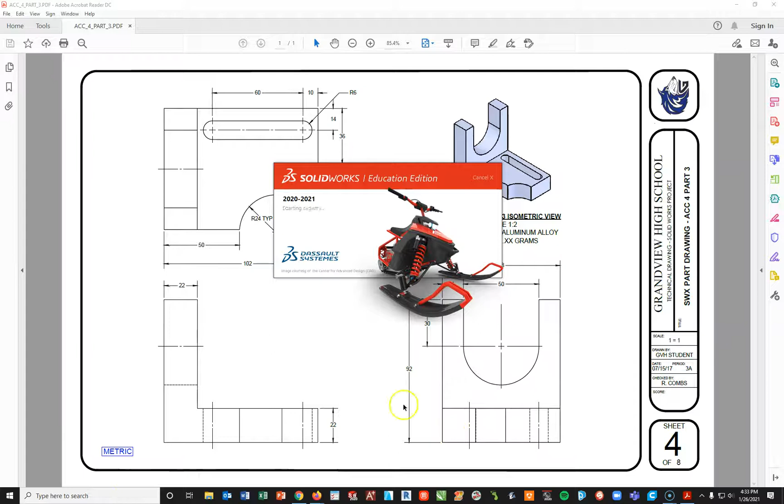So we're going to start with our SOLIDWORKS. I'm going to go ahead and get my SOLIDWORKS up and booted. It'll take just a moment here, but as it's booting up, let me talk about the plan of action.

Okay, I'm going to start this from a front plane and basically create this L shape right here. That will put me on this face over here. And what I'm going to do is extrude it across, turning it into one basically L piece, an L bracket.

With the L bracket, then I'm going to come in and hit this back face here and do this U cut. Then I'll come back to this face here and cut out the slot and these two little cuts here. All right, we'll add our material and we'll throw this into the drawing.

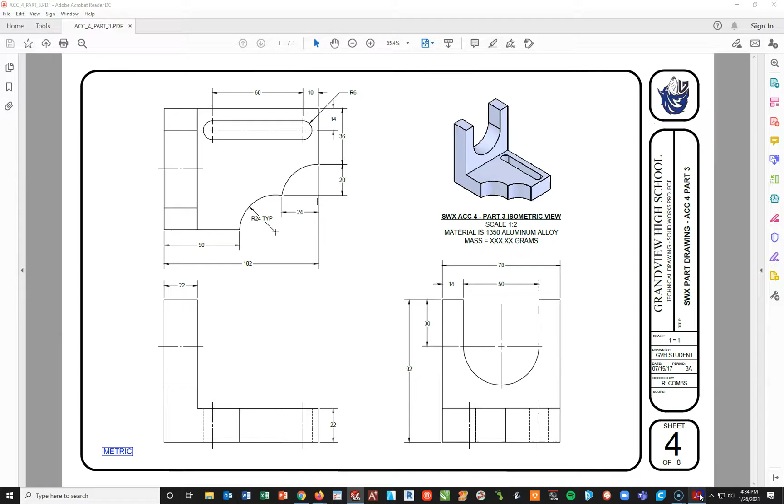So with that said, let me drag my SOLIDWORKS over to here and get started on our metric part. So I'm going to do a File New, and in this case right now I'm going to slide over my part so I can see my dimensions. And I'm going to go ahead and start with a File New. Okay, it takes a second to boot up.

Maybe, it's on the wrong page. It comes over here, and I'm going to go ahead and click on Metric. Say OK. Design tree is going to open.

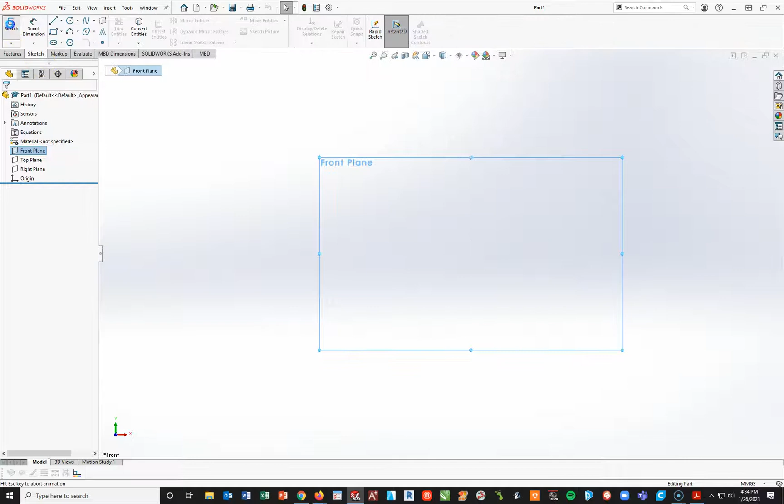I'm going to start off on the front plane with my sketch tools. So Sketch and Start a Sketch. And I'm going to start off with a line tool, and I'm just going to basically take my line tool and create a large L shape.

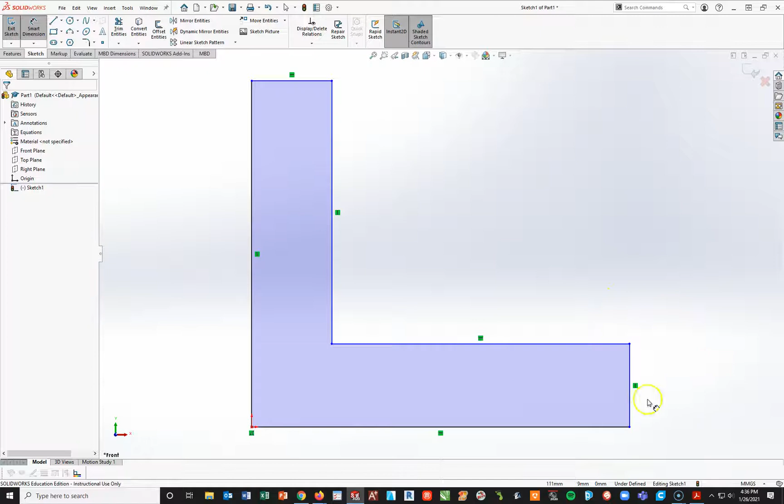I'm going to hit Escape to deactivate my tool. Hit your F key to center up, and go ahead and start our Smart Dimension tool. I'm going to hit 22 on this side, and 22 on this side.

And then I'm going to go ahead and get the overall height of this at 92 millimeters. Ooh, that's really close. Okay, and then the length of this is going to be 102. So I'll put 102.

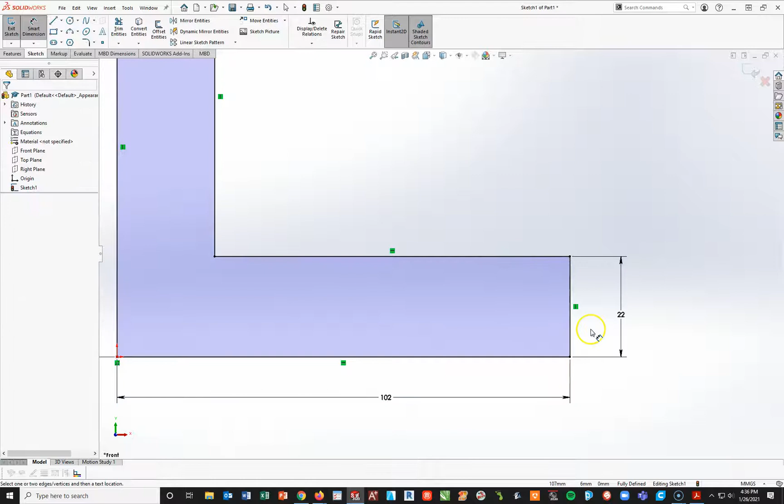I'll hit my F key, and then I'm going to go to Features, Extrude Boss Base, and extrude this out a distance of 78 millimeters. And hit my check mark.

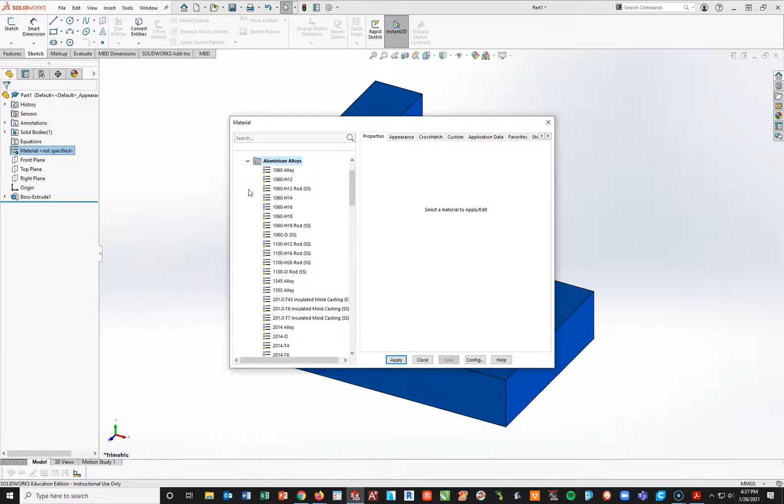Hit my F key to center up, go to my material right here and right click, and I'm going to go ahead and add my material, which is an aluminum alloy. So I'll go to my aluminum alloys. I'm looking for a 1350 alloy. So I'll go down here and order 1350 alloy, apply, and close.

I'm going to do a Control S to save. Let's go ahead and save this as all caps, ACC4 underscore your last name, and hit save.

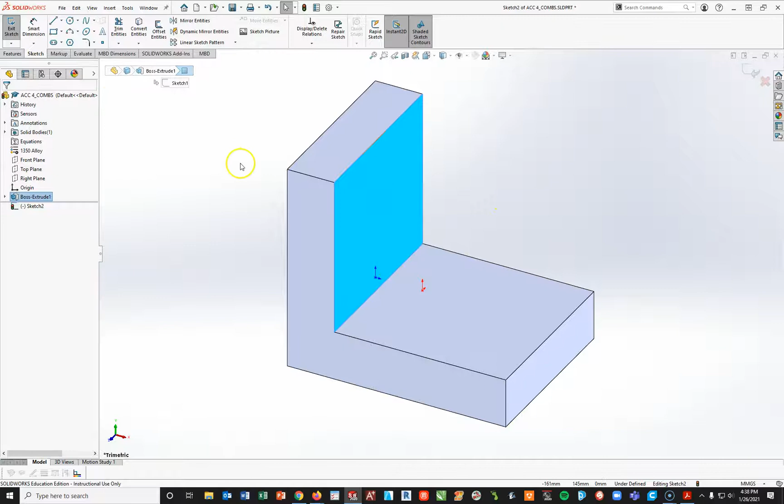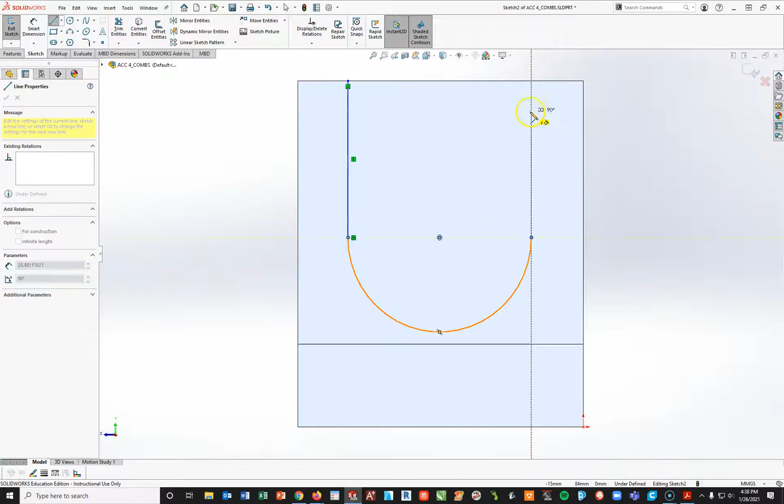I'm now going to go ahead and hit this back face right here and start a new sketch. Spacebar, normal to, and what we're going to create is that U shape. So what I'm going to do is take my line tool, and starting at the top edge, pull straight down about 2/3 of the way down, pull back, touch this edge right here, left click, pull straight up, and close.

Hit Escape to deactivate your tool and turn on your Smart Dimension. I'm going to add the following dimensions. I'm going to go across here at 50 millimeters, pretty close.

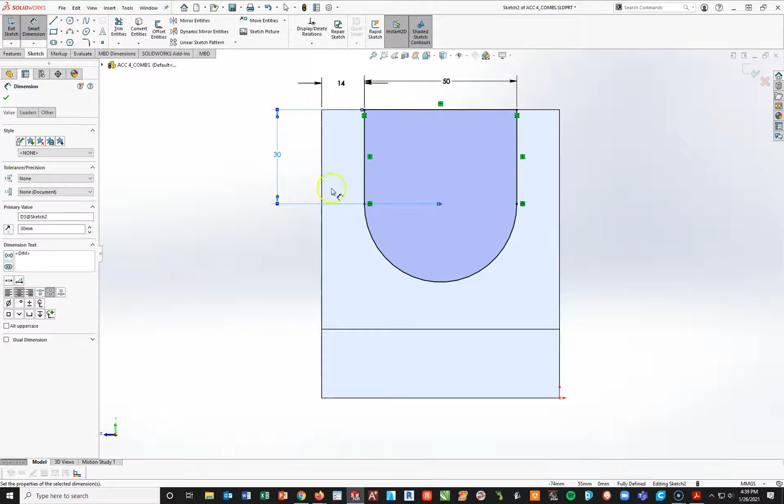And from here to this edge at 14. And from this center here to this top line, I'm going to add in 30 and get this to be fully defined. Our final step will then be the Features, Extruded Boss Base, and through all.

So now I'm going to go ahead and hit my spacebar, isometric. And now what I want to do is click on this top face and start a new sketch.

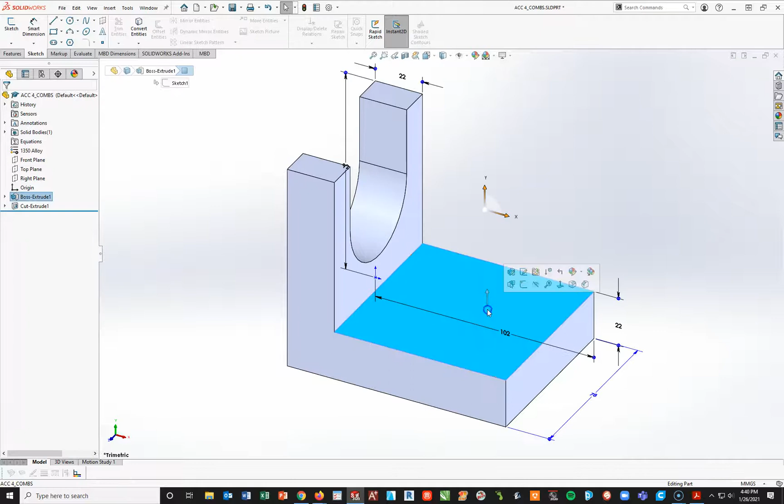Spacebar, normal to. Okay, I'm going to start with my slot tool here, and I'm going to start with a left click on this top part here, probably about 1/3 from the left and 1/3 from the right. Kind of pull up a little bit and left click.

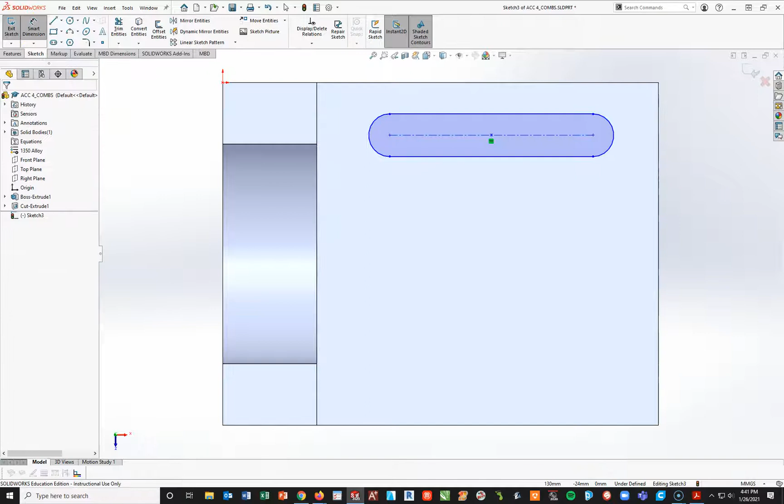Now I'm going to go ahead and Smart Dimension this before I add my other cuts. I'm going to start by dimensioning this at a radius of 6. And from here to the side, a dimension of 10. And then from center to center, I'm going to make this 60. And then from the center line to this edge, I will make this 14.

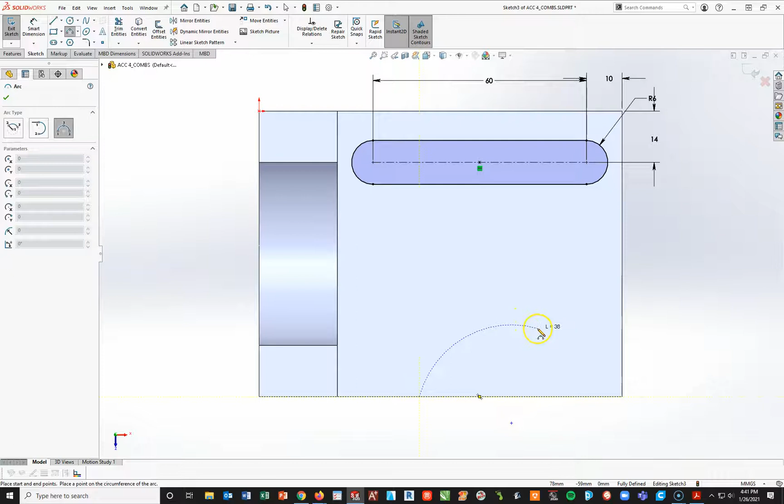I'm going to go ahead and get out my dimensioning tool, and turn on my 3-point arc tool. From here I'm going to start drawing some arcs, basically from the side, to make kind of a heart shape. I'll put one about here. It's a 3-click process, so I'm going to make a really shallow arc like this. Then with the tool still active, I'll click this end as click number 1, this edge as click number 2, and again make a very shallow arc with click number 3.

I am then going to go ahead with my line tool and close this off. I'm going to hit escape to deactivate the tool.

We'll now go ahead and turn on our Smart Dimension tool, and from here let's add in our key dimensions. First I'm going to add in a dimension of 24 millimeters here. I'm going to escape for a second because these two, in the dimension it says TYP, so I'm going to hold my control key and make these two arcs equal. Hit my check mark.

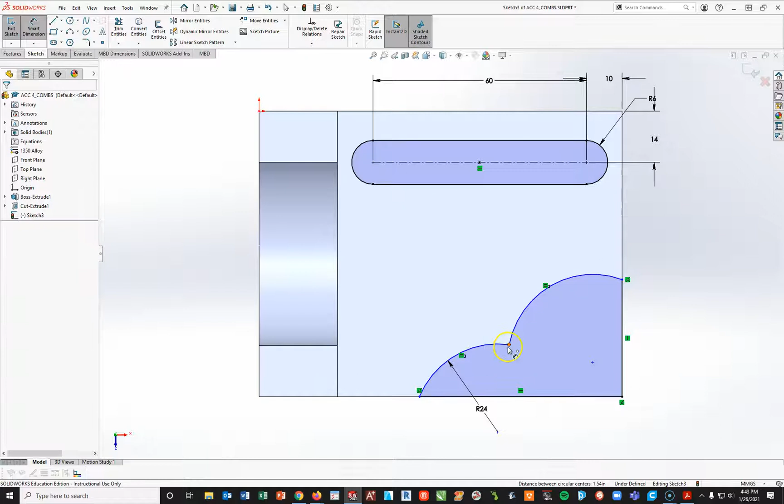I'm now going to take my Smart Dimension tool again, and from this point here to this edge, I'm going to make this distance 24. Then from this point to this point, I'm going to pull straight out and make this 20. From this point to the back edge here, I'm going to make this 50. And then this edge here, or this point to this edge, I'll make into 36.

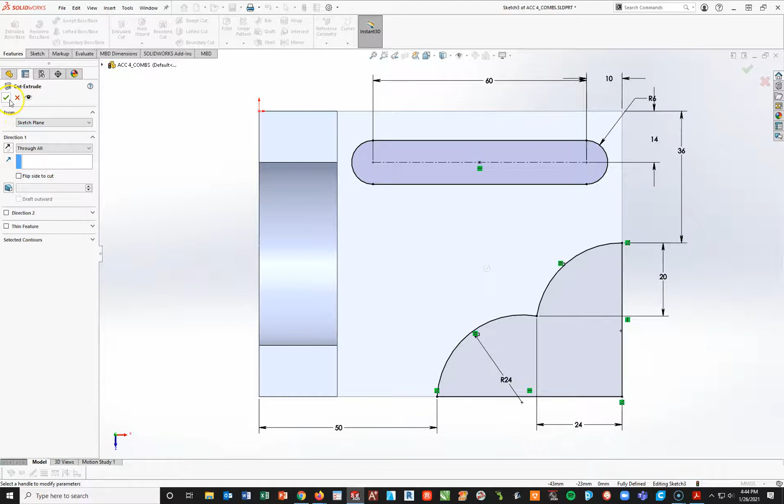Once you've done that, you'll see that everything should be fully defined right now. So at this point I can cut both of these off. I'm going to go to my features, extruded cut, and do a through all. Hit my check mark, and now with a space bar isometric, there is my final part.

I'm going to do a Control S to save, and go into my evaluate and mass properties. Where's my mass properties? Right here. Oh sorry, it's on the other screen. I apologize. And I get 517.18 grams.

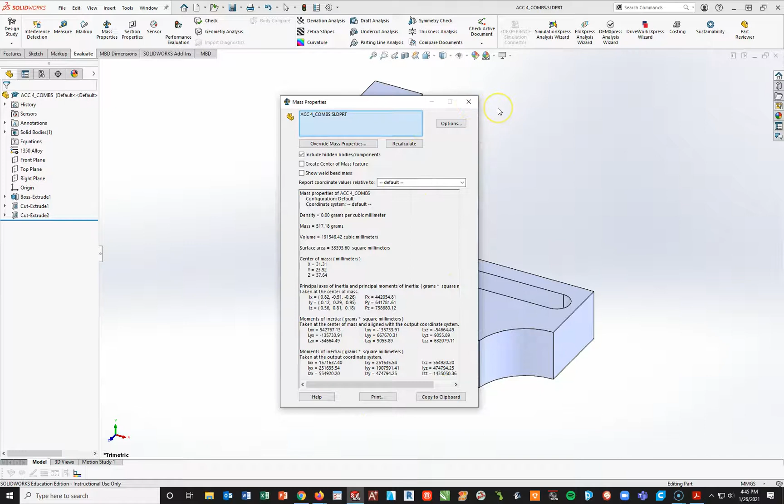Okay, now we're going to get ready to do a new drawing. So we're going to start with a file new and do a GHSB metric and say OK.

With the border now open, I'm going to go ahead and double click the ACC number 4. Here are my open documents. If you don't see that there, then you need to browse for it by clicking browse and locating it where you saved your part file.

I'm going to double click, and just like we've done before, I'm going to start with a front view, turn on my preview, hidden lines on. In this case we're going to go with a custom scale, and we're going to change it from 1 to 2, and change it to 1 to 1.

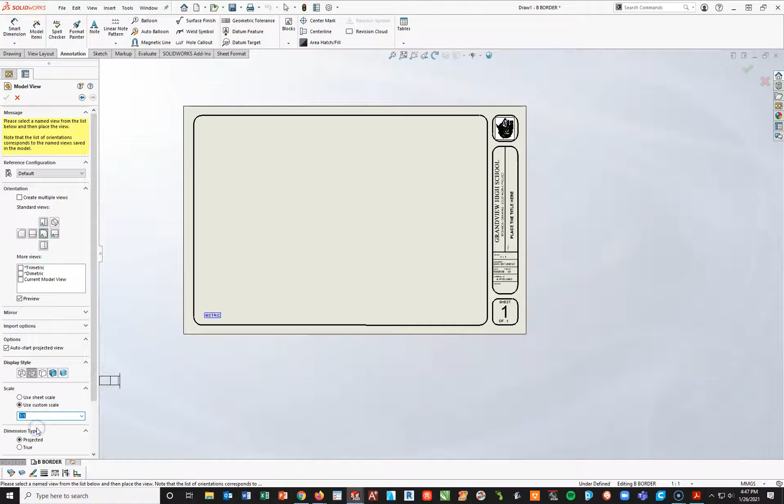I'm now going to come over here. I see my preview, I see my hidden lines on. I'm going to drop the first view in this lower left-hand corner, top view, right side view, and my isometric view, and hit escape. I'm going to click on my isometric view and add color.

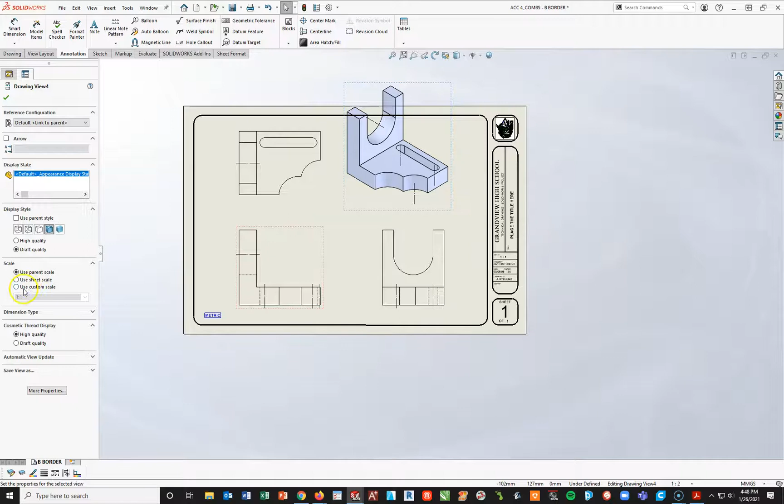I'm going to also change the scale to 1 to 2. I'm going to adjust and move, and as I blow up into this, highlight and hit delete on all of these extra lines. Hit your F key.

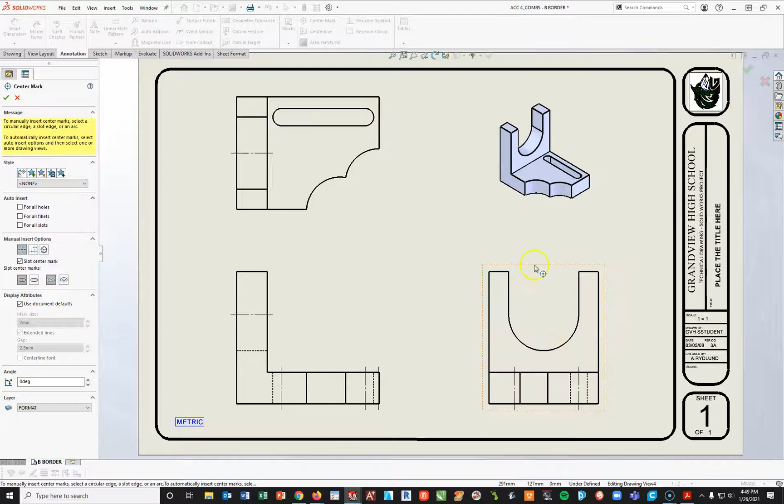Now I'm going to go ahead and go to my annotation toolbar, go up to my center mark tool, and we need to add some center marks here. We actually have a couple. The first one I want to add is to this little arc right here, to make sure I have a center mark to indicate where the center of this arc is. So I'll click right here. I also need it up here on this one.

Oops, I hit my check mark. I had to turn these on separately. Go to this one, I'm going to hit this edge right here, okay, for my slot. However, the slot is in the center, or the center mark is in the center of the slot.

Over here to the left, I'm going to go to slot ends and hit my check mark. I'm going to do one more center mark, turn it on, and click both of these arcs. However, I need to make these smaller. Okay, so I just want these plus signs.

So over to the left, I'm going to go to Use Document Defaults, uncheck it, and uncheck the extended lines. And now they'll just be plus signs. Hit your check mark, and now you're ready to dimension.

Turning on my Smart Dimension, I'm now going to go around, and I'm just going to go view to view and add in the key dimensions for each view.

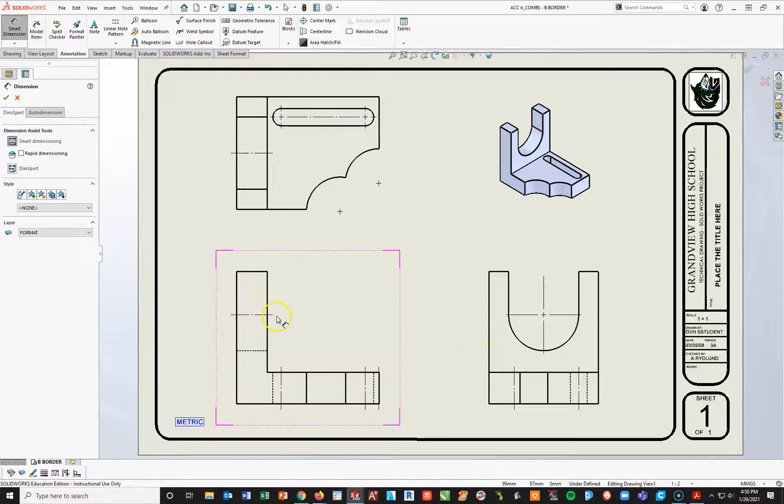So on the front view, I'll click on this top line and make that 22. I'll click on this side line - oops, not that line there. As a matter of fact, that line needs to be deleted, and turn my Smart Dimension back on. I'm going to dimension to that right there.

Moving over to the right side view, I'm going to go from this line to that line, will be 30. From here to this bottom line will be 92. This line will be 14.

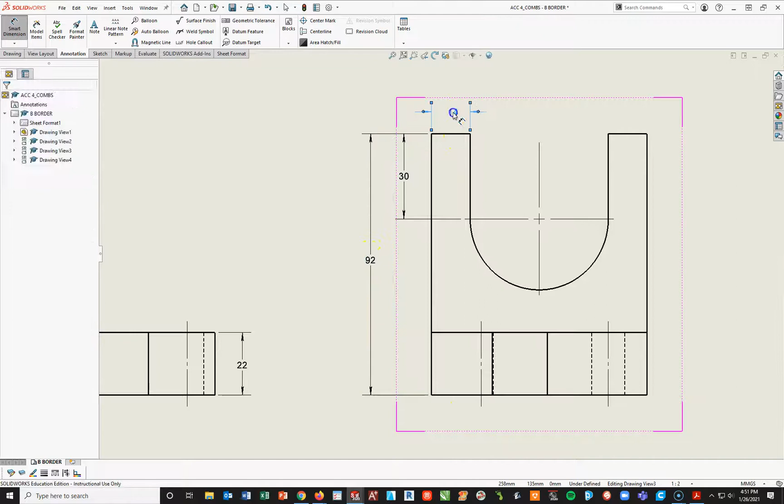This line will be 50. And then from left to right - oops, delete that - from left to right will be 78.

Let's go to our top view. Turning on my Smart Dimension tool one more time, I am now going to come up here and begin to add in the final dimensions here.

So from this edge here to this point, we'll make that 50. From this very front, or very back, to the very front will be 102. I'm going to click on this arc and put this right in between.

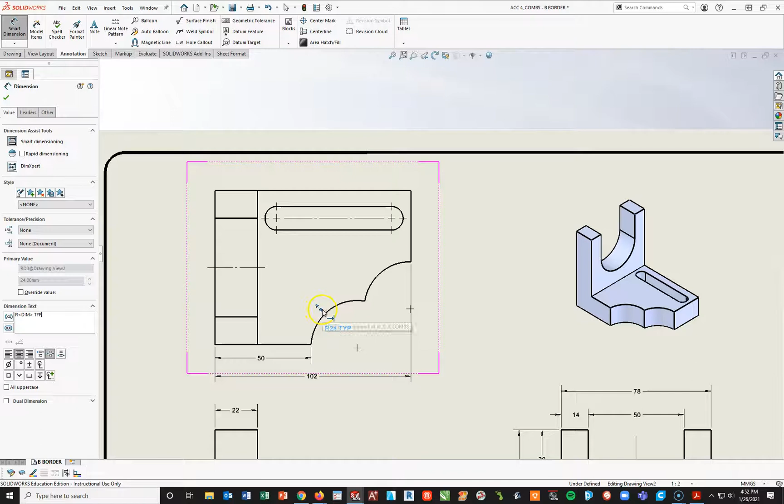And then over here in the white box, put my cursor in there and type in TYP. I'm going to make sure that arrowhead is flipped over, so I'm going to kind of blow up on this and flip that arrowhead to just like that.

And then I'm going to go from this tip right here to this side and make that 24. From this tip right here to this tip here, I'm going to make this 20. From the top up here to that tip right there will be 36.

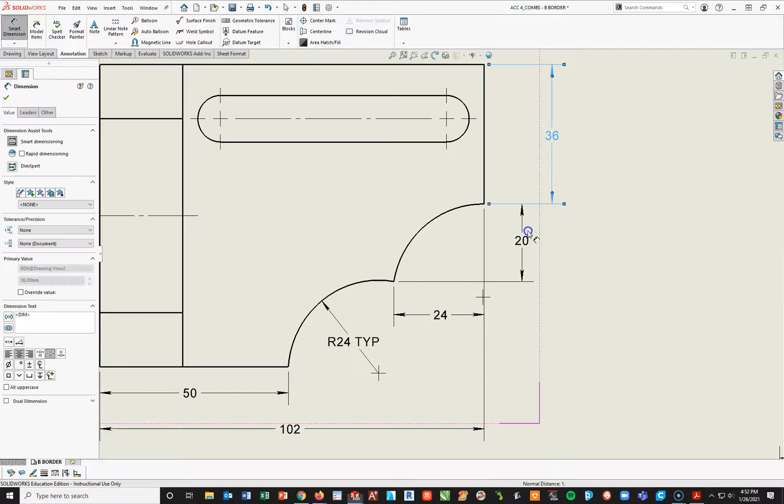I'm going to kind of pull these ones out because I need to do a couple other dimensions. And then I'm going to finish off with this dimension from here to here at 14.

This dimension from here to here will be 10. And then from this edge to this edge will be 60.

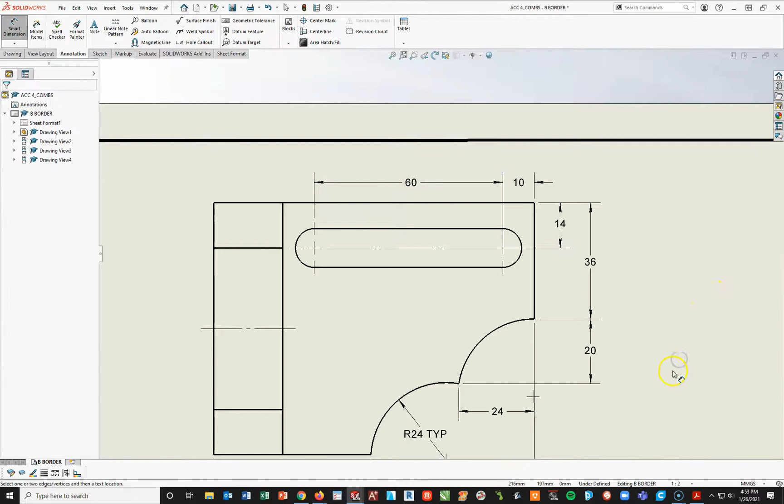And at this point, F key, all my dimensions are in place. So I'm going to do a quick Control Save, yes to updates, and then say Save.

We're now ready to add the title below here and do our title block.

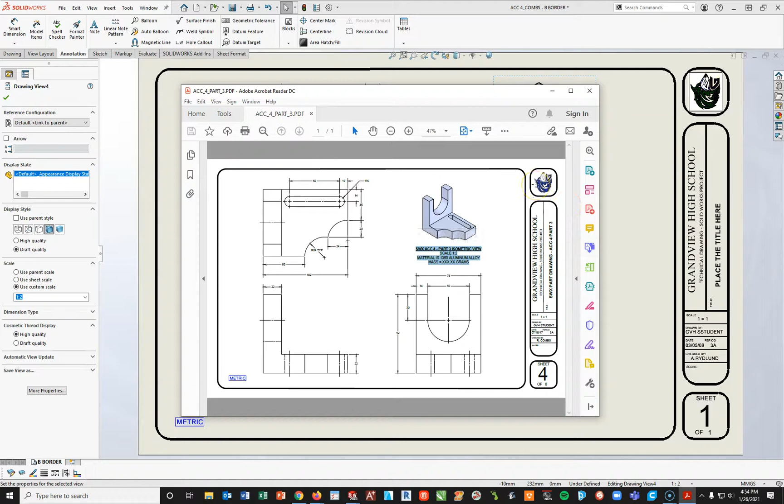So now I'm going to bring this drawing back over temporarily and take a look at this title. And just like we've done before, I'm just going to do a left click and drag across this title. I'm going to do a Control C for copy, move this back over.

Then I'm going to go under my annotation toolbar and hit the Note tool, click underneath the part right here, and do a Control V for paste. Now we want to make sure this is centered, so I'm going to left click and drag.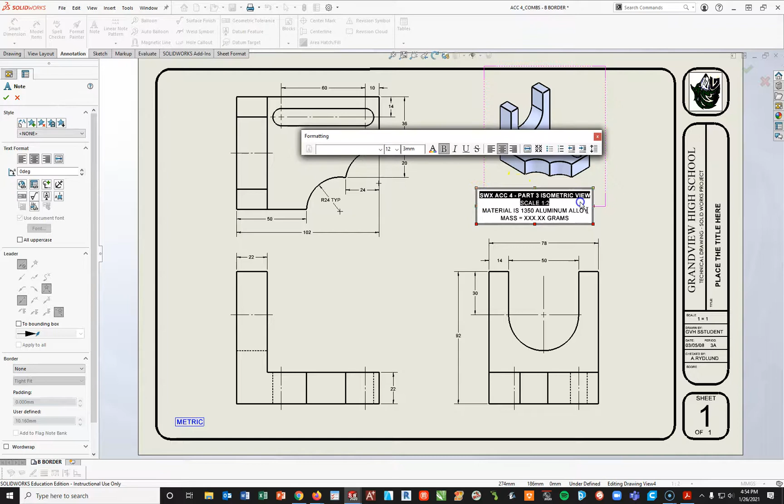And with this tool right here, I'm going to go to center. Then I'm going to left click and drag across this top line and make sure that's underlined. I'm going to hit my Note tool, check mark, and adjust this as I need to.

I will finally go ahead and over here replace this title, where it says 'place the title,' double click. With my caps lock on, we're going to type in SWX, part drawing, space dash space, ACC - I'm just going to do ACC 4, that's good enough.

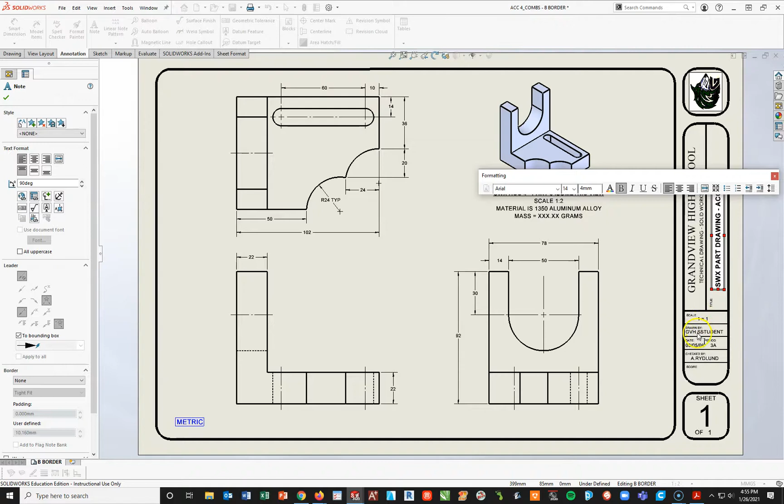Scale will be 1:1. Where it says GVH student, you are going to put your first initial and your last name.

Then from there, we're going to change our date to 01/25/21. Period will stay as 3A, and then you're going to change the name to R. Combs.

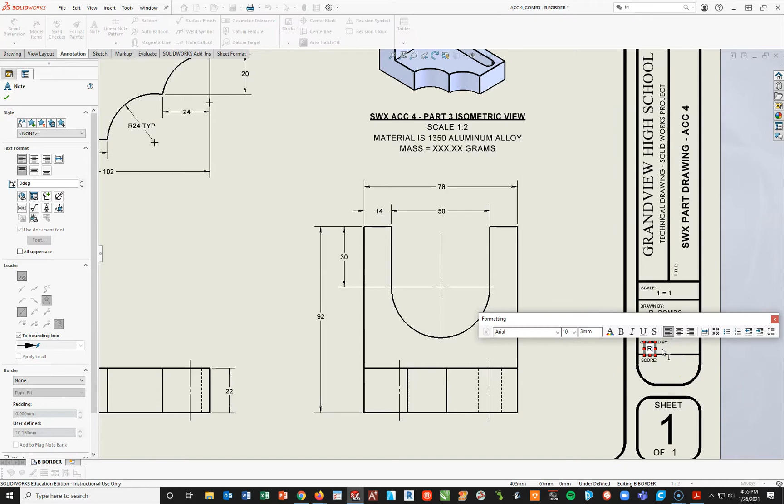As soon as you have that done, I'm going to hit my F key, do my Control S, and when you get into class, or if you'd like to upload this to Schoology or in class, print this and turn this in for grade.